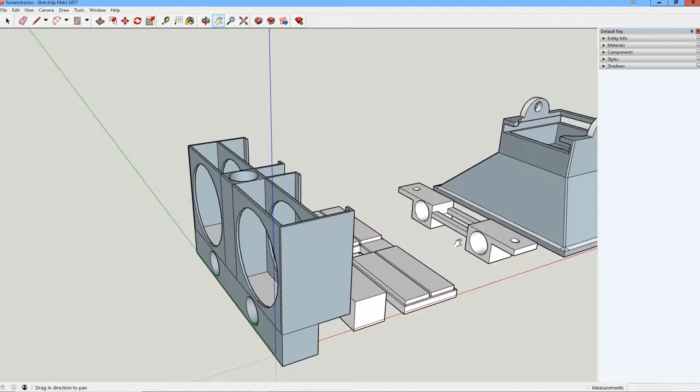Now I have the materials I want to use, I need some parts. First thing I will need is some fans for the back. As you can see here, this is where I'm going to be putting my fans. I've managed to design it so that once this cap is on, that fan will be completely blocked.

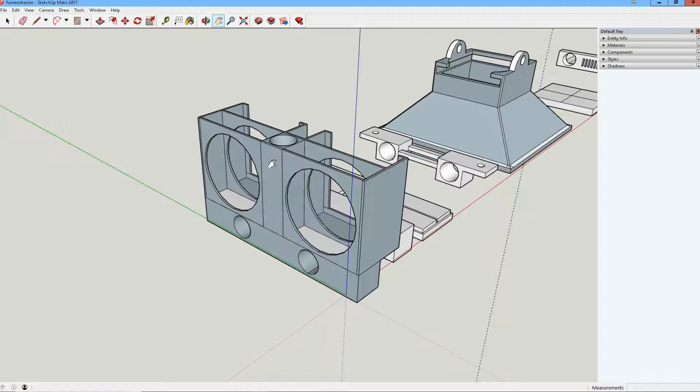The only thing I didn't design yet is the cable coming from the fan, how to make that look pretty at the back here. I'll figure that out in either a redesign or by adding another attachment onto the back and seeing how it goes.

So I decided to use some 80mm fans I picked up from Best Buy, house branded Insignia fans, which then I could add some fan grills to the back as well. So I picked up some cheap ones on Amazon so I wouldn't put my finger into the fan blade while it's running.

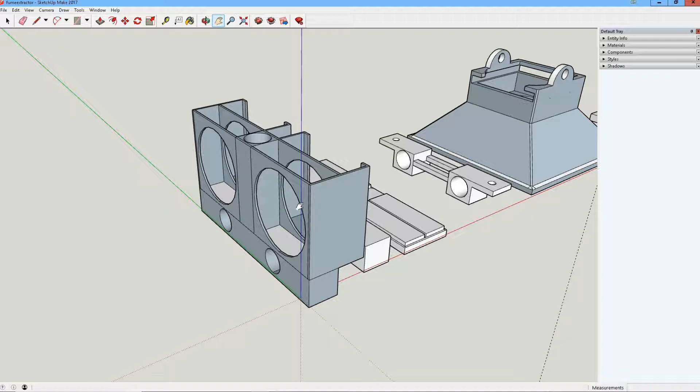For the filter, I designed a 3-piece system that would work with the cheap filter I found for this project. In theory I think it should work, but it might obstruct the airflow a bit, so I might have to redesign my filter system later as well.

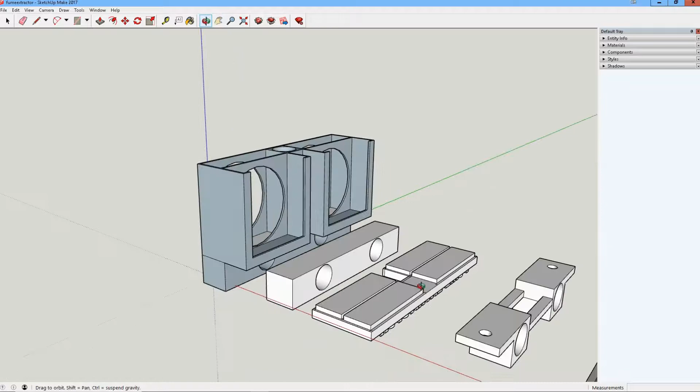What's going to happen is the 3/4 inch conduit is going to come out of the bottom here, and it's going to attach to 2 of these pieces right here.

Now, I wanted something where you could attach any sort of plate on top of it. So if you have different soldering needs, or want to do some wood burning and want something stronger on the bottom, you could swap out the plates. So I made a quick connect system for this, so that once I get my initial bed size that I want, I can reproduce and design things for adding accessories such as my helping hands, or other things as well.

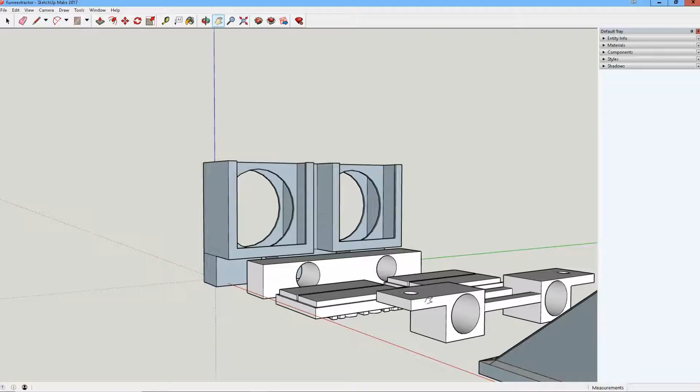That will go through there, and this was my original one right here. If you look, I originally just did a block, but then after I printed it, I thought, well, how am I going to mount the top board to it?

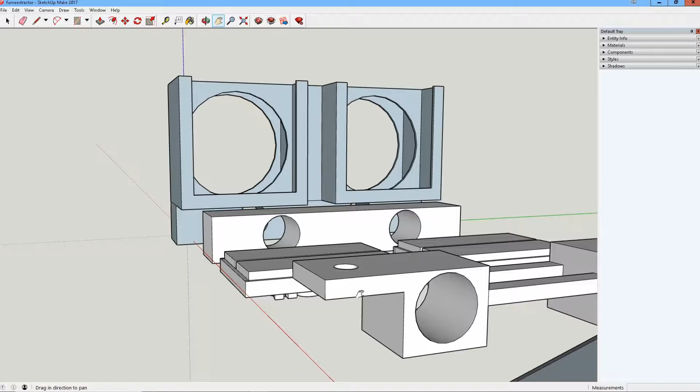And that's when I came up with the design for this, being able to actually screw these supports onto the top plate. This piece here is no longer needed, yet I have it printed, but I'll use it as a reference later on as well.

With most of the electronics selected, I probably will use a few switches mounted in a housing on the front, but for now we'll just get the main body design completed and printed.

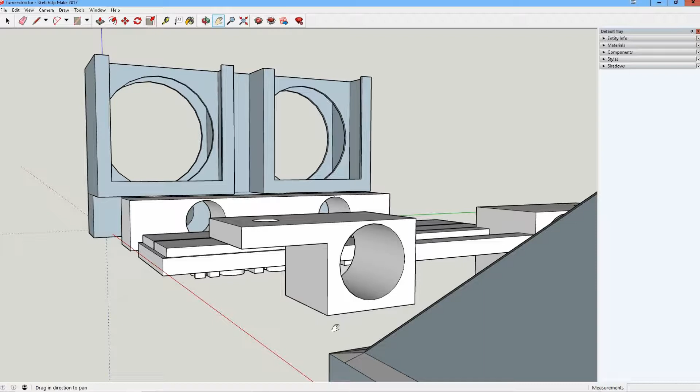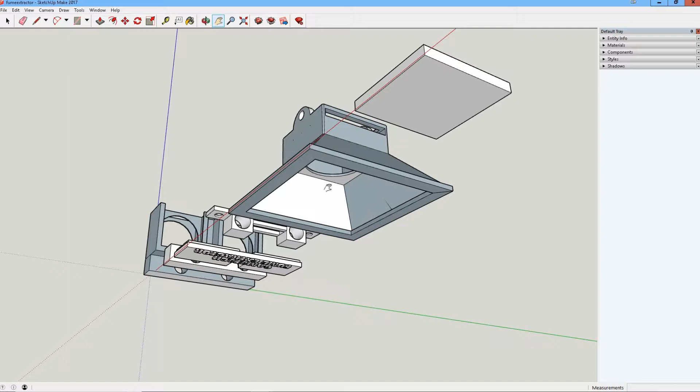As you can see here, I've made a few different accessories for it. This one is for an overhead fan extraction system, which I'll be putting a light in as well. The light will be able to light up what you're working on below. And there's a bunch of other attachments that I want to do.

For the front control panel, this is what I originally started with, but I'm finding it to be more of a nuisance than anything. So what I'm going to do is get it together and see how much room I need for my switches and everything, then redesign my case for the front, because I don't want too much obstructing the actual working area, so you have as much room as possible to work on.

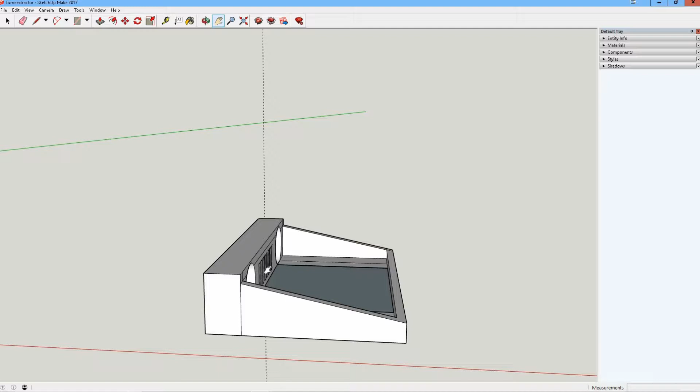As you can see, there's not that much here. It didn't take me too long to design. So now on to the printing part, we'll just skip that, head over to the bench and have a look at the parts all printed, and then we can see how it all fits together.

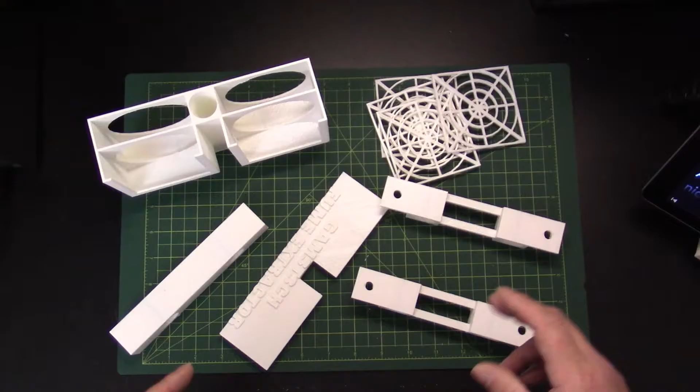Let's have a quick look at the pieces that have been printed. This is the main fan housing filter system, which also has the hole at the top for the piece of conduit to go into.

And then we will have this top plate here, which will go on top of it like that, allowing for the conduit to still come out the top. Now, I have to clean that up yet, so I will do that at the final portion.

So this is what I was originally going to use, a block like this, with the top plate connected to the conduit. But then I decided I would do something like this, where the conduit can go through, and I can adjust if I need to make my bed size bigger or smaller as well.

So I'll have two of these guys here, like so, and then this one here, and then I'll have my front plate as well, which will house my power switch and any sort of fan control, or if I want to add an extension up top for a hood that I started designing in SketchUp, I'll be able to add that as well.

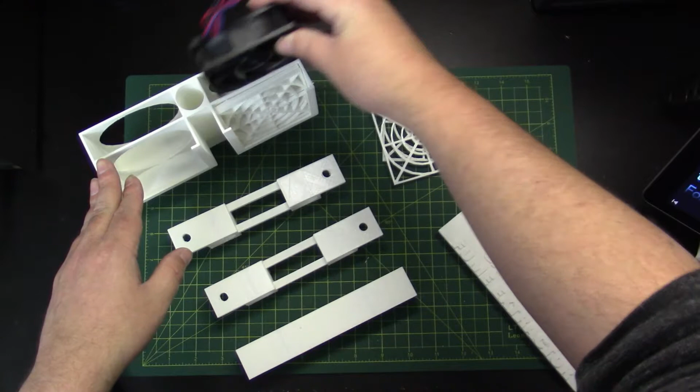So this is the first part. Now we've got the fans. They should slide in there fairly nice and just kind of click in there. We just want to make sure the exhaust on the fan is going in the right direction because we want it to go out, so this part here needs to be on the inside.

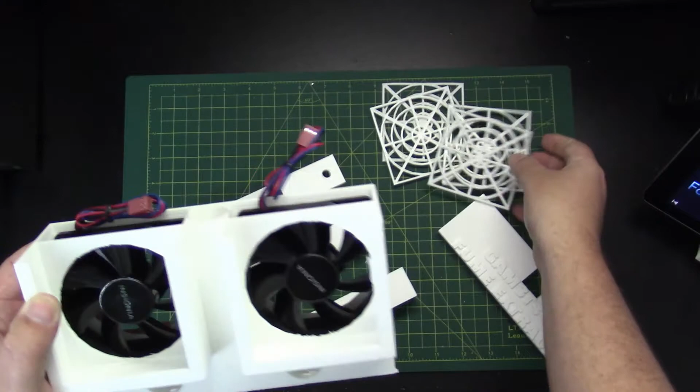And as you can see, it's got a nice fit. And there we go, we've got the fans in there.

That should do it. And then at the back here, what we'll do is eventually add those grates. I have those right here, and that will just go on the back, covering that so you don't put your fingers in there. Not that you would, but just in case. Safety first, so that'll go there.

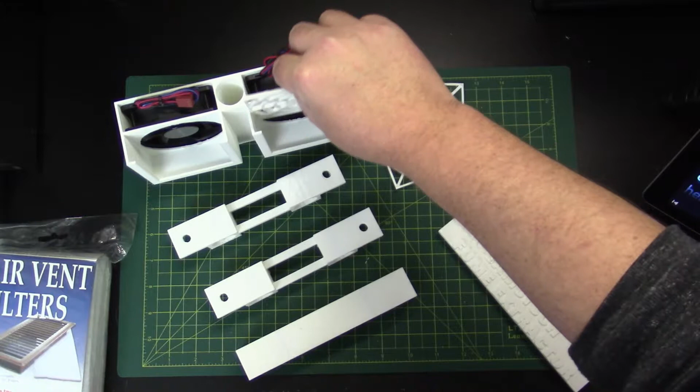This is just the cheapest filtered stuff I could find. I didn't want to spend a lot of money, so I figured I'll try this air vent filter. I can always change that out after, or change the method I use for putting it together. I just wanted to do it this way so I prevent any of the materials from the air vent from going into the fan blades.

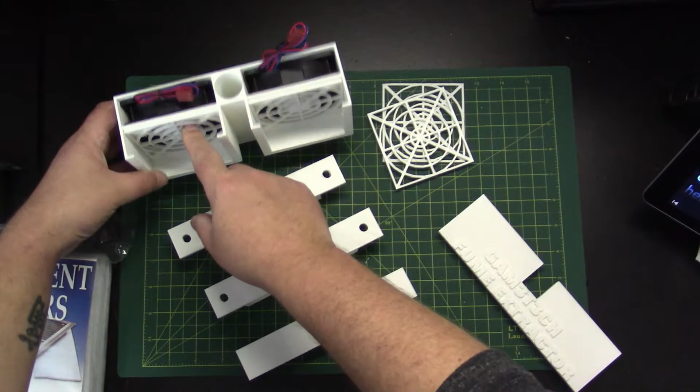And then just to tidy up the front of it and make it look a little bit better, that top plate will fit over top of it here and sandwich it all together and make it all pretty.

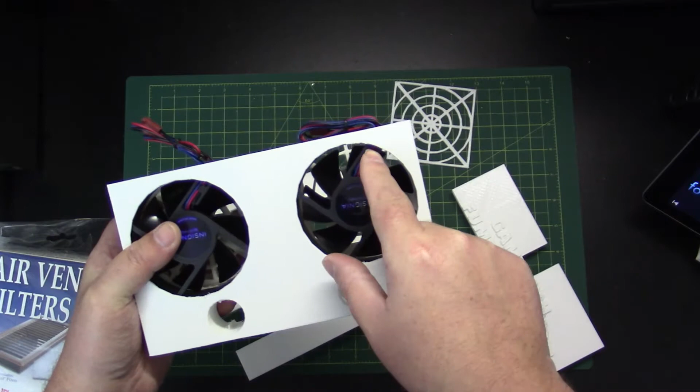But I have to figure out what I'm going to do with the wires yet. I haven't come up with anything for that. So for now, I'm going to probably just have them come out the back here and route them over, or maybe put a hole through something. I don't know, I haven't figured that part out yet. I'll just have a cover for it, and eventually they'll run down the length of the conduit to the front control panel.

So I'm going to go ahead and start getting this together, and we'll give it a test and see what happens. I'm going to get the air vent cut and all the parts cleaned up a bit more so they fit together nicely, and then we'll run the conduit and see how long we want to make that.

Maybe I'll see if I have time today and make a plate just for fun, maybe out of wood, to have a little plate there so you can get an idea of how it looks. Then I'll 3D print it, so I have a template of where the holes are going to go and the sizing. So let's get to it. Alright, here we go.

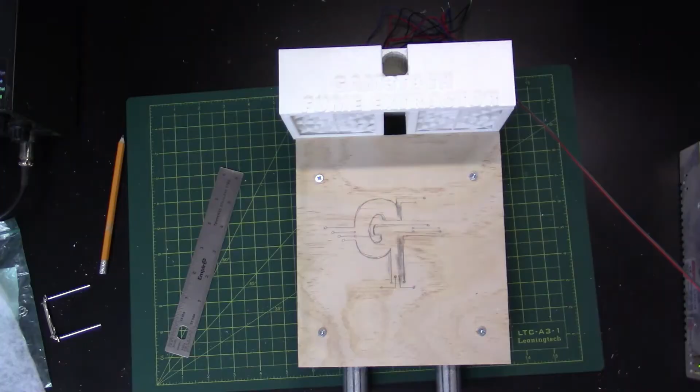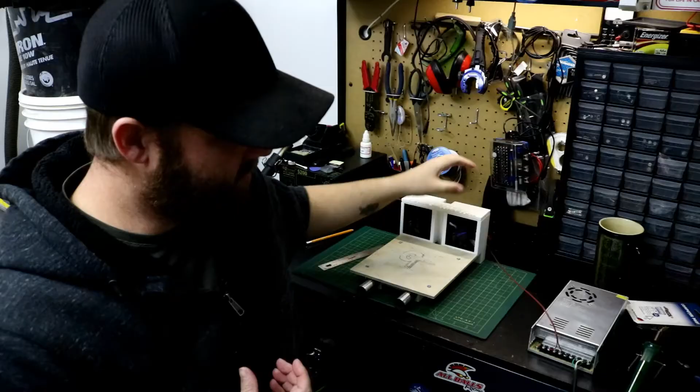I definitely need a fan or some sort of blower with a lot more torque, so I'm going to do some research on that. But this was certainly a fun project to play around with and see what happened. All in all, I tried the fans in the front and in the back, and both produced a not ideal solution for a 12-volt unit.

Okay, so it didn't really go as planned. I think there's a lot I can do to change it up and make this concept work. But at this point, do I really want to, or do I want to attempt another design?